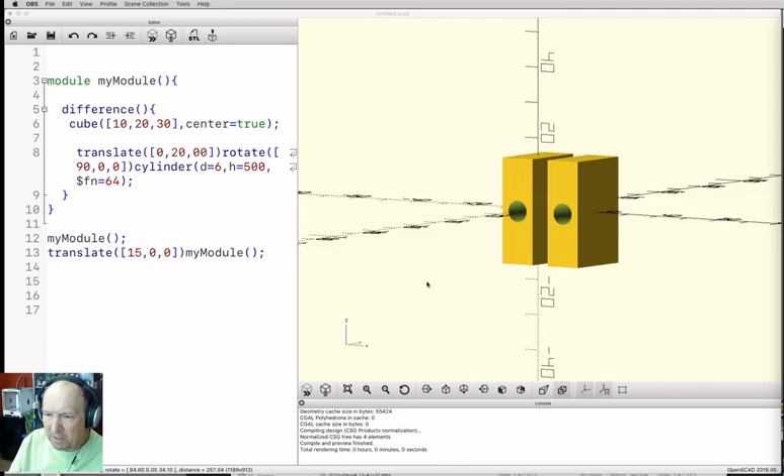So what I want to do now is make a copy of the servo motors. Before we can incorporate these into our design, we really want to see what they would look like, so let's make one of these.

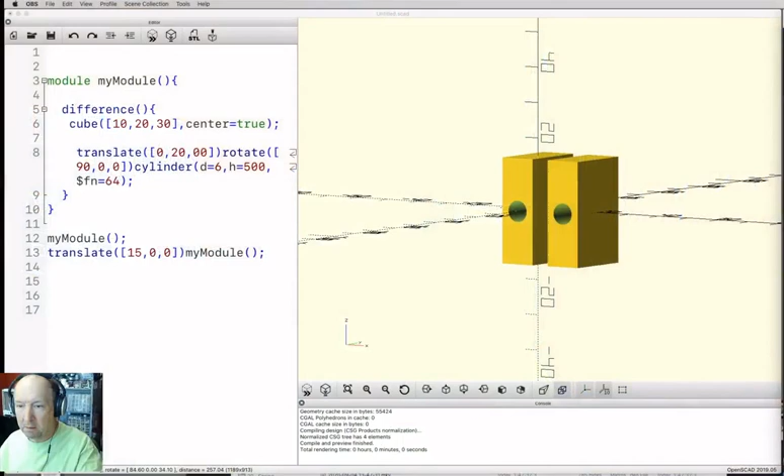Let me just get rid of everything that's in here since I'm starting over. Okay, and that goes away.

The first thing I want to do is use calipers to make a measurement, in millimeters. We've got this basic cube shape to start with, so let's just start that. It's a cube, let me do that. Cube.

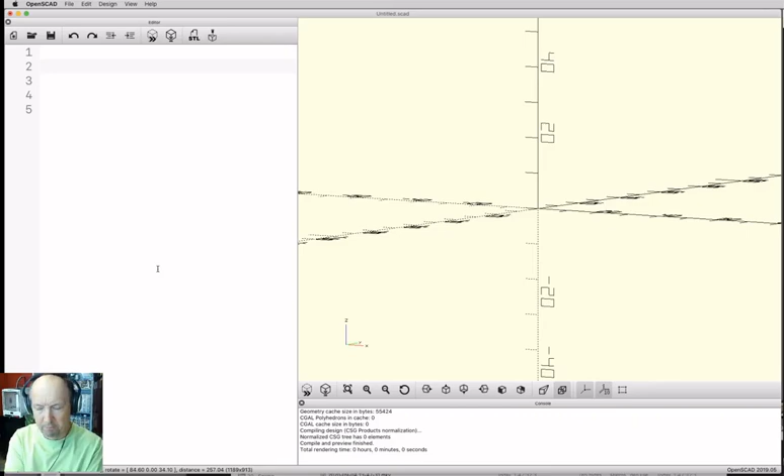X dimension is going to be 22.5. Y dimension, I'm going to hold it this way, so Y dimension is front to back. That's going to be, looks like about 12.3.

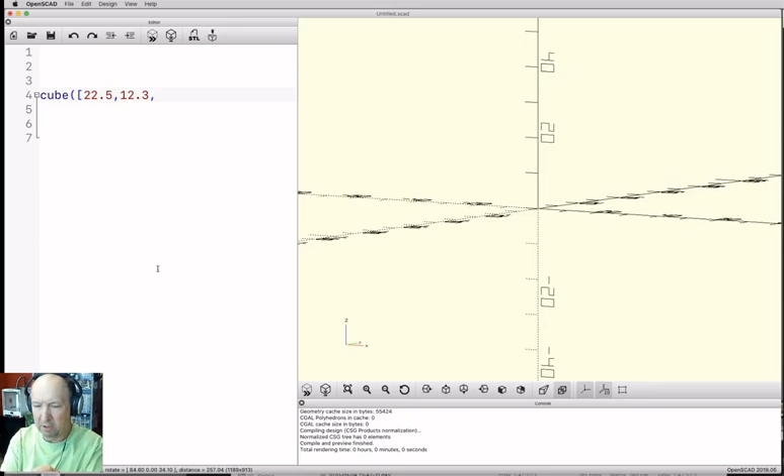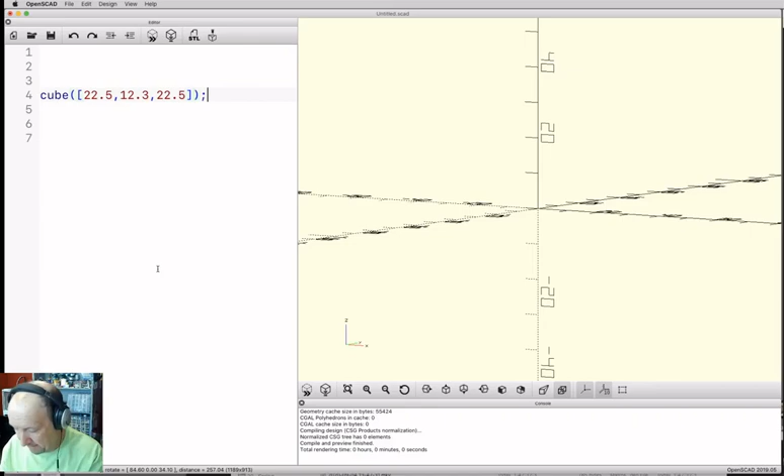And the height, now it's got the round piece on the top. I'm going to ignore that for the moment. I'm just going to go to the height of the main part of it, because we want to actually model the whole thing, and that looks like it's about 22.5 also. Close that, hit F5. Okay, so there's the body.

We've got these wings on the sides. I need to put those on there too. Everything is additive, so if I just make a whole piece that's big enough for it, let me make another cube, and we're going to have to use translate.

So let me just put that in there first. I'm just going to put in zeros because I know I'm going to need it, but I don't want to put it in there yet.

Cube, and the X dimension, I was holding it this way, so X dimension is now 32.5. Y dimension, that's the same as the other one, that's 12.3.

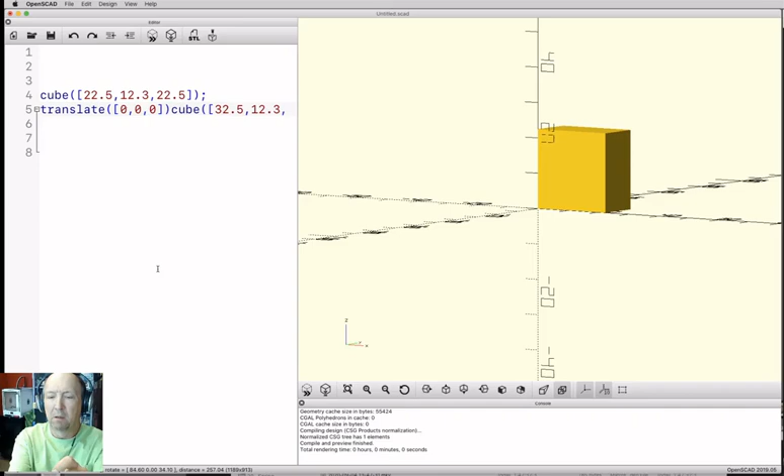Z dimension, this thing's really thin. This thing is only 2, let's say 2.3.

Okay, so when I hit F5, there it is. Okay, so it's not in the right spot. We got it in there, but it's just not where we want it to be. It needs to be slid over about half of what's left up here.

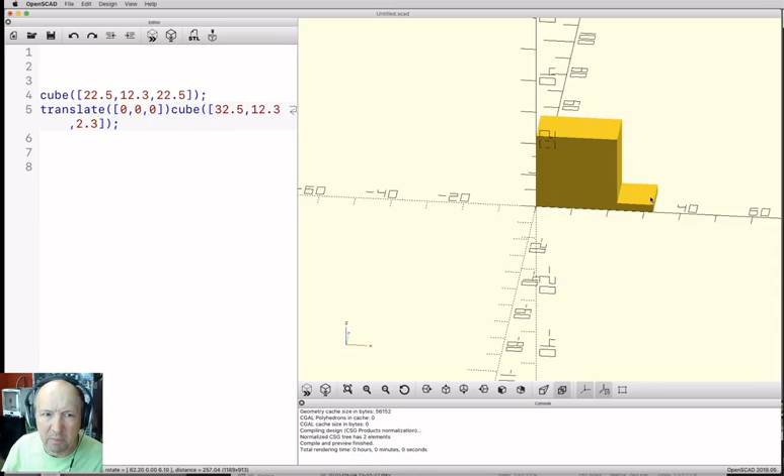Now we know that this is the X direction, so the cube is 22.5, and this is 32.5, so this is 10 millimeters more. So I really want to slide it over 5 millimeters. Let me go 5. Oh, wrong way, put a minus sign.

Okay, that looks good, except it's not quite where I want it to be. It still has to go up. So, with the micrometer, I want the bottom of that piece to be—if I just hold it about right—some of this just has to be really close. It doesn't have to be perfect.

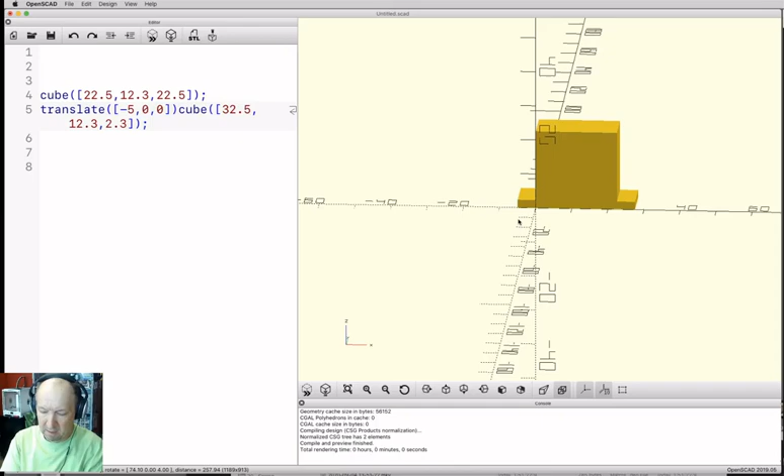We're something like 16, so if I just translate it 16, that's not bad. Okay.

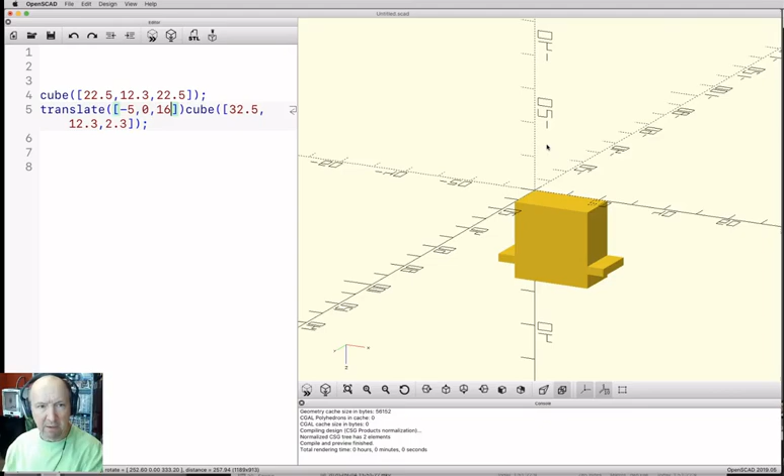No, it's got 2 holes in it. Remember we did that last time, we had the difference command for that. So if I come in here—remember it's really hard to find stuff if we don't do that.

Let me put the cylinder in first. We know we're going to need to translate it. Translate. Okay, and I'm going to put in zeros because I don't know what I want to translate it to yet. And I want to do a cylinder.

And I want a cylinder that is—wow, those holes are really small. Let's say the diameter is going to be 2.5. D equals 2.5. I'm going to make it really tall because I want it to stick out the top regardless of where I put it. Makes it much easier to find. Okay, and the whole thing's that, so let's make it about 40.

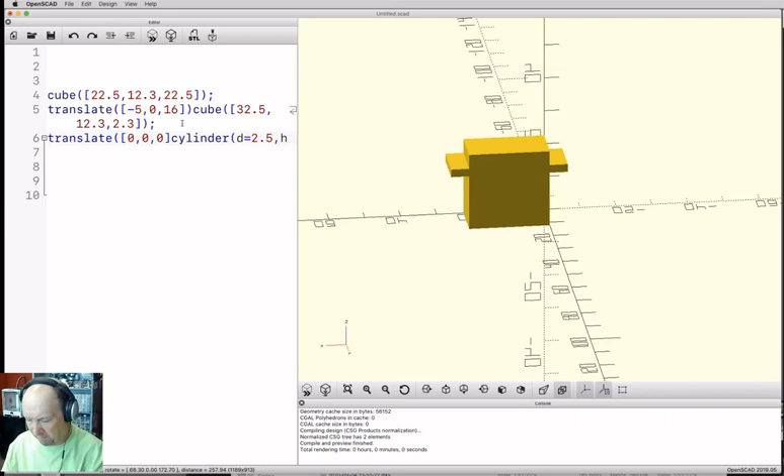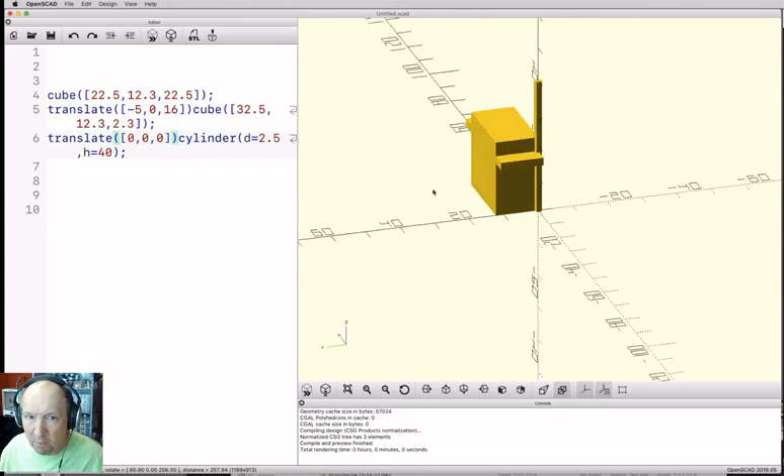So when I hit this... oh, I didn't get a parenthesis there. Now let's try it. Okay. You know, and it really isn't round. When you get really small ones, it doesn't get very round. We can make it a little bit more round.

I can say comma $fn equals number out of the air. I'm just going to pick 32.

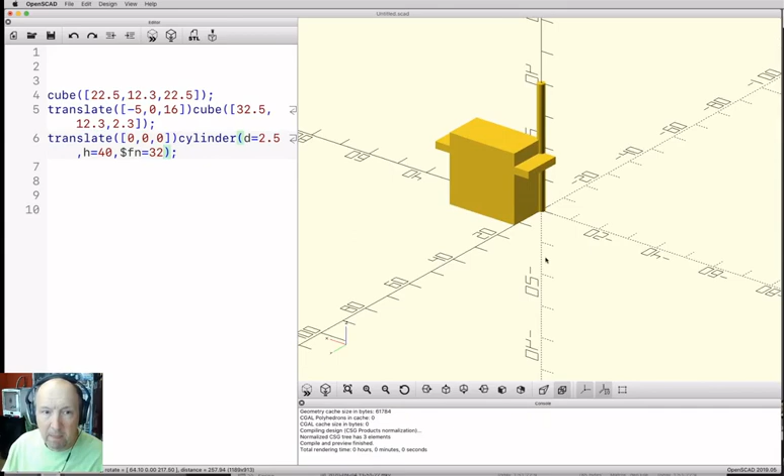Okay, so that's where it is. That's not where I want it. It needs to be translated. So I need to be in the center here. So the center is going to be half of this thickness. The thickness is 12.3. You know, I really don't want to have to do this math all the time.

Okay, let's see. It's in the Y direction. So if I come up here in Y, and I want 12.3, half of that, divided by 2. I can do the math right in line. Okay, that's a start.

Now, we know that we went over - I'm looking at where the center of this hole is versus the edge, and it almost breaks out. So I'm just going to kind of eyeball it, and I'm going to say it goes over 3 millimeters. Let's see what that looks like. And that's actually in the minus X direction. So we're going to take minus X, minus 3.

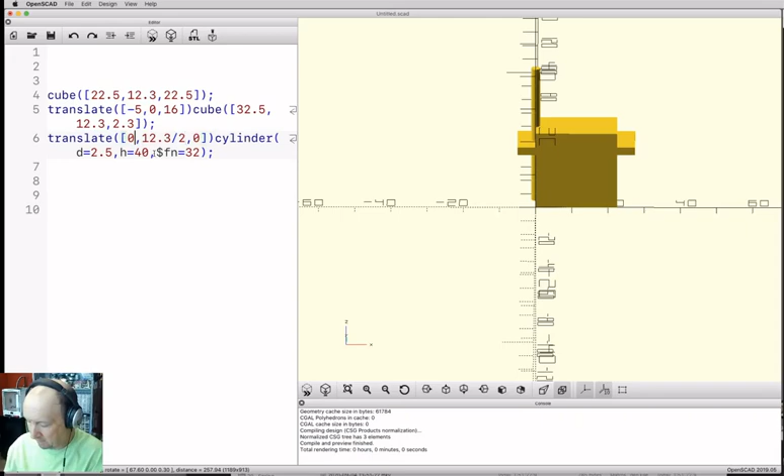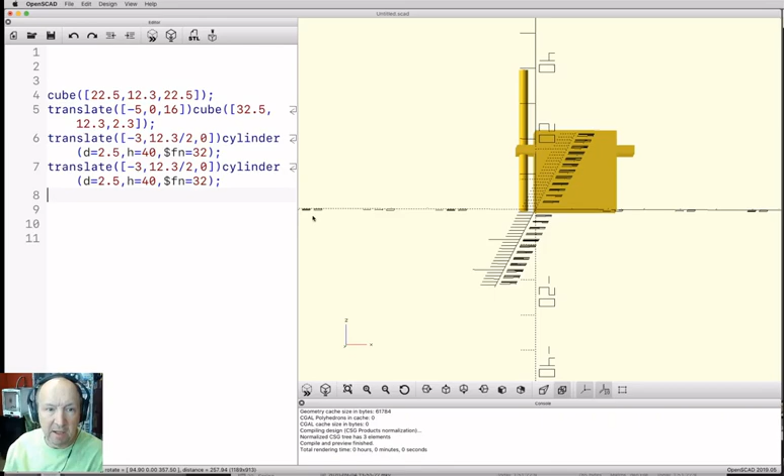Okay, that looks good. I want this whole thing again, but I want to move it to the other side. So let me just copy this, come down here and paste it again. But this time, instead of minus 3, I want to be plus something. I'm just going to guess it, 20.

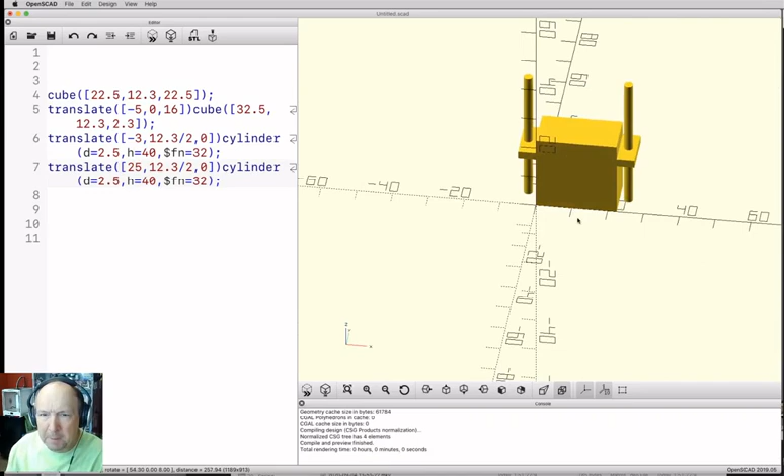Not enough. Okay, 22, 23. That's getting closer. Not quite. Let's see. That's 26, too far? 25.5. That looks about right.

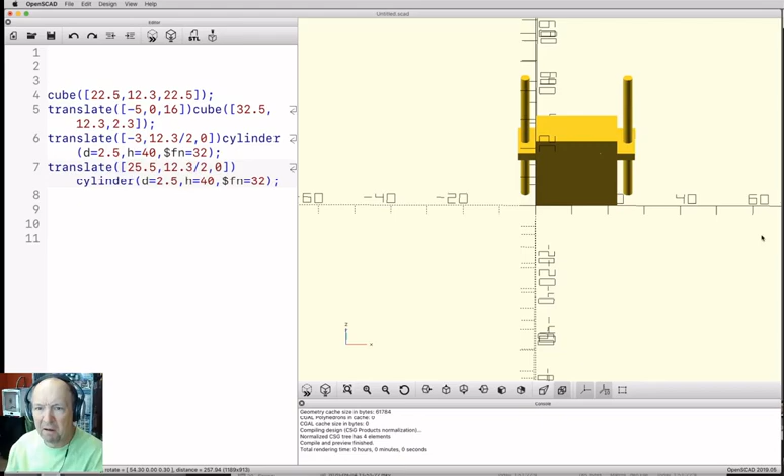Okay. But I don't want pegs there. I want holes there. So now I can come up here and I could say, well, the first cube is the big block of everything. We just leave that alone.

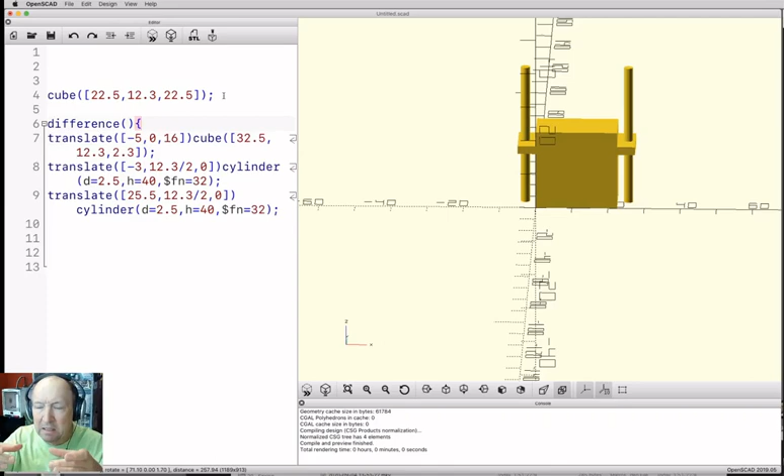But if down here, if I come in here and say difference, it's going to take the first thing, which is the plate that's really wide, and then everything else gets subtracted from it. And I need a closing for that. And now when I hit F5, that all goes away and leaves me the 2 holes.

Okay, we're not quite done. We're close. I need on the top of this thing, there's the round pieces, and there's actually 2 of them. One of them is kind of centered and is not very big around. It's only about 6 millimeters in diameter. And its height - these 2 are both the same height, and it sticks up about 5 millimeters from the top.

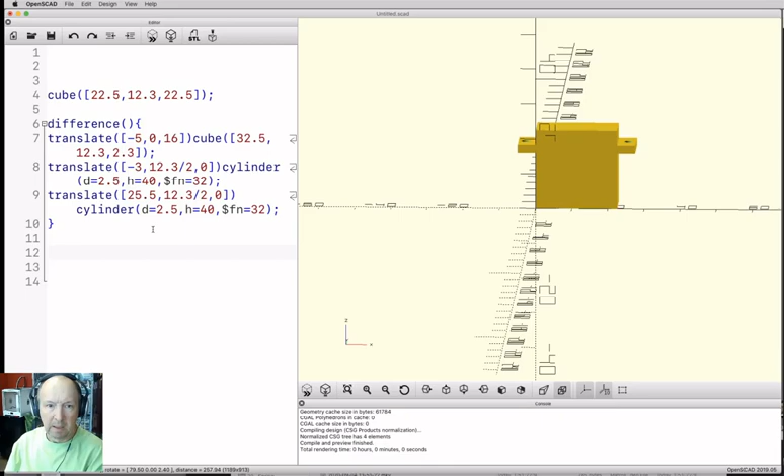So, okay, so there's the cube, there's that. I need another piece. I want another cylinder. And I want D equals 6 millimeters diameter. And I want H equals to whatever that height was of that initial cube plus 5.

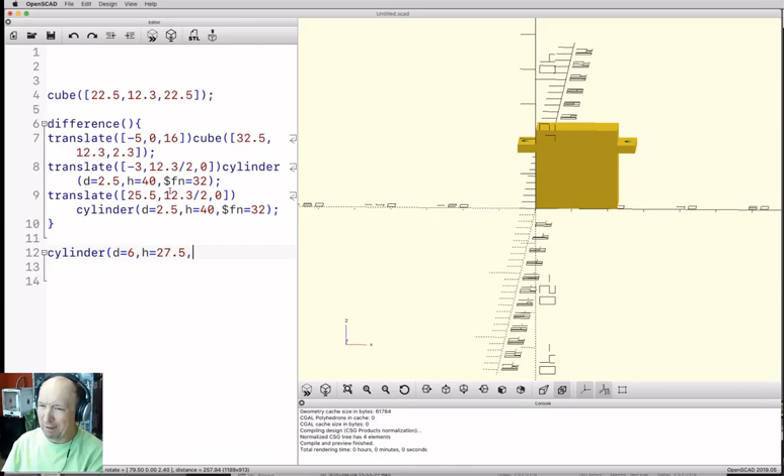That's the 22.5 I could see at the top line. Up here, this is 22.5. I want 5 plus that. I can do that in my head. That's 27.5. Okay, 27.5. And I know it's going to make it really goofy, so let me go ahead and just put that $FN equals 32. Let's try this.

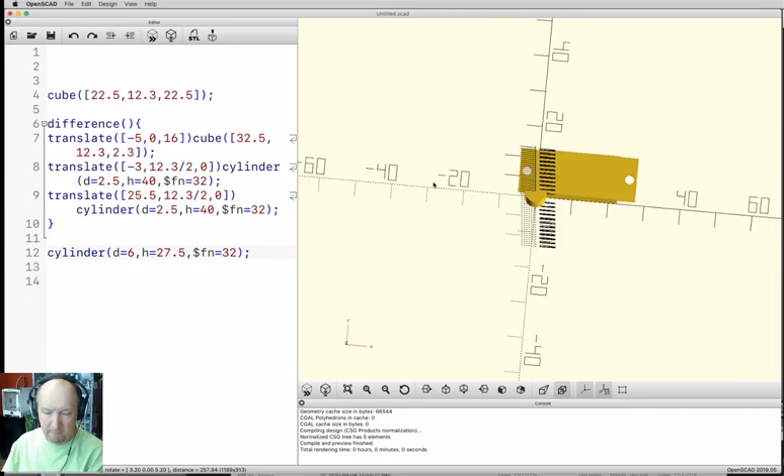Okay. It does - you know, it's in the wrong spot, so that makes it look really goofy. So I need to translate. Let's see. Let's go over here. Translate. Let me just put in zeros. That didn't change anything. Okay.

In the Z direction, no, we're all fine there. And in the Y direction, that's at half. And we did that once before. Because this is 10 millimeters thick, we want to go 5. So let's go 5.

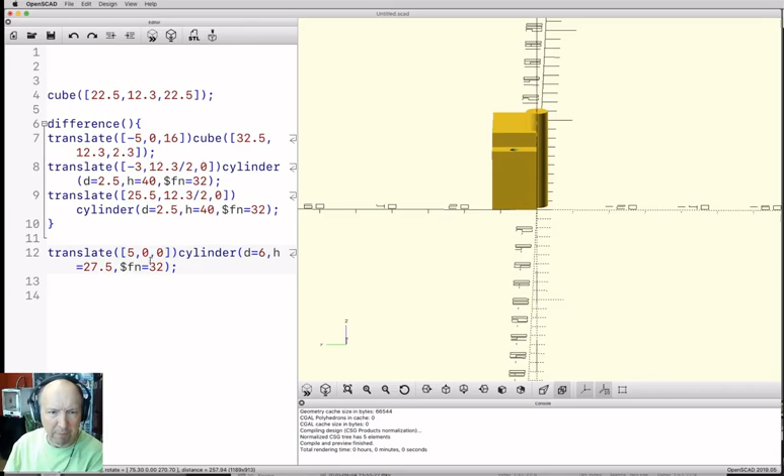No, that's the wrong one. 5. That doesn't look right in the middle. That should be right in the middle. What did we do? Oh, it's 12.3 divided by 2. Ah, yes. 12.3 divided by 2.

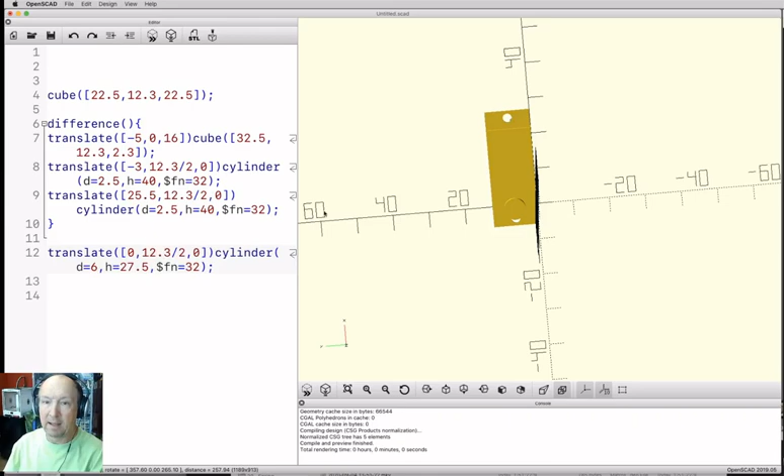Ah, that's better. Well, kind of. We need this actually centered. This is the small little hump on the side of this particular one. So what I need to do is, I need that right in the center of the cube. So I got that side centered. The other side centers out at - it's 22.5, so it's going to be 22.5 divided by 2.

In the x direction, 22.5 divided by 2. Okay, so there's the one peg. You know, we're starting to get close. So I just need that other piece in there.

Okay, so in its diameter, by looking at this, I could see that it's just the same diameter as the whole case, which was that 12.3. So I need another one. We'll have to translate it, I'm sure.

And I want a cylinder. D equals - this one's the 12.3. H, it's the same height as the one we just did, so that's 27.5. And let's do that. And what does that give us? That gives it something I can't type. I forgot an equal sign.

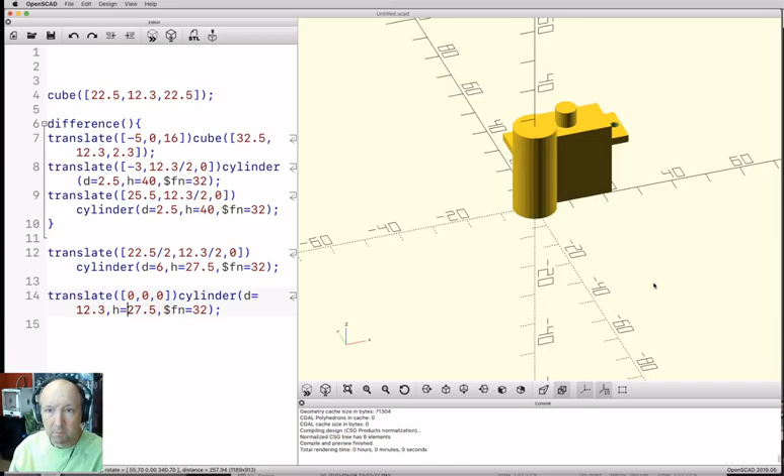Okay. Well, it needs to go in the Y direction, that way, just like the other cylinder did, the one above us. So the Y was the 12.3 divided by 2. So let me do that.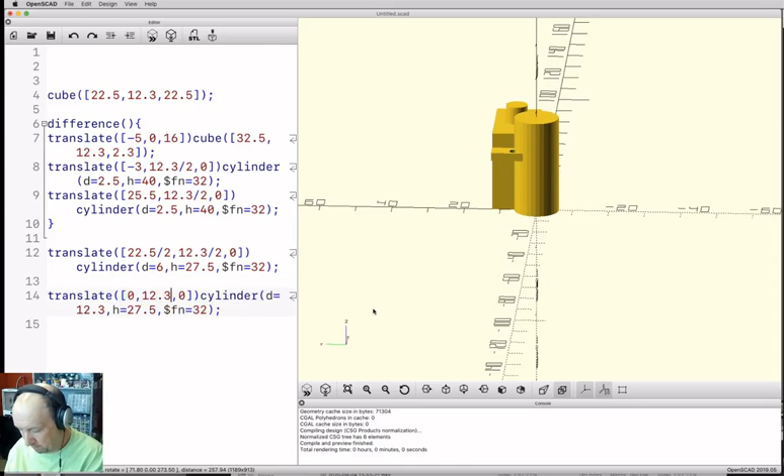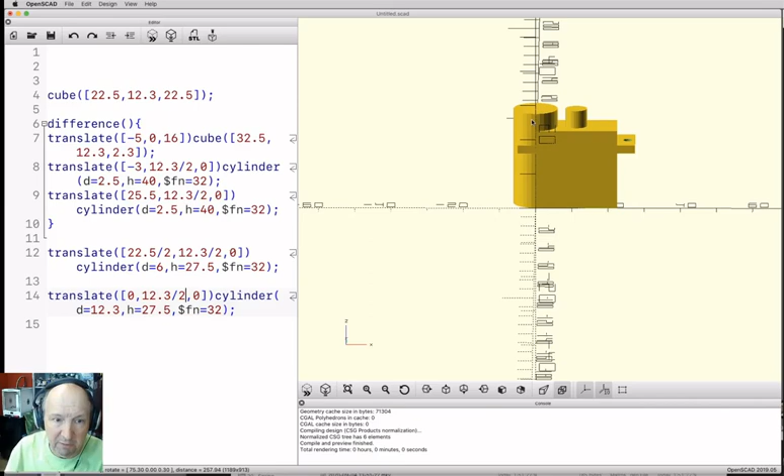And now it needs to slide over just until the edge of that cylinder is just flush with the side there, and that side is right at this axis. So if that's a 12.3 diameter, I want to slide it in the x direction, 12.3 divided by 2 also. Let me do that. If I miss this, it'll show up.

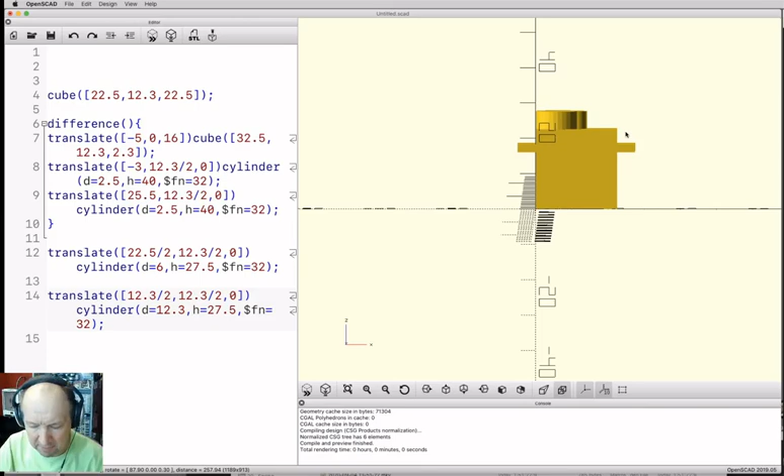Okay, so that's the servo. But now I need the little white cappy thing that sticks out the top. Just trying to make this accurate. It looks like it sticks up another maybe 3 to 4 millimeters above that, maybe 3.5.

So I want the same thing again, just like we did before. Let me just copy this. Copy, paste. But now the diameter is really small, so I want the cylinder to be 5 millimeters in diameter. So this goes down to 5.

And I want this to stick up a little bit taller, what did I say, 3.5? Let's go for 3.5. So I want the 27.5 plus the 3.5. Okay.

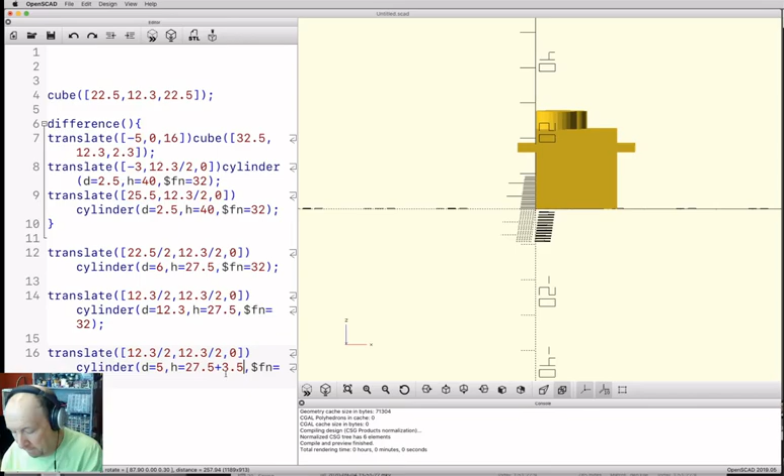But it's centered at the same, so the translate should be fine. So, okay, here's the model of the servo. It looks amazingly like the thing that we just did. And we did it in 12 minutes.

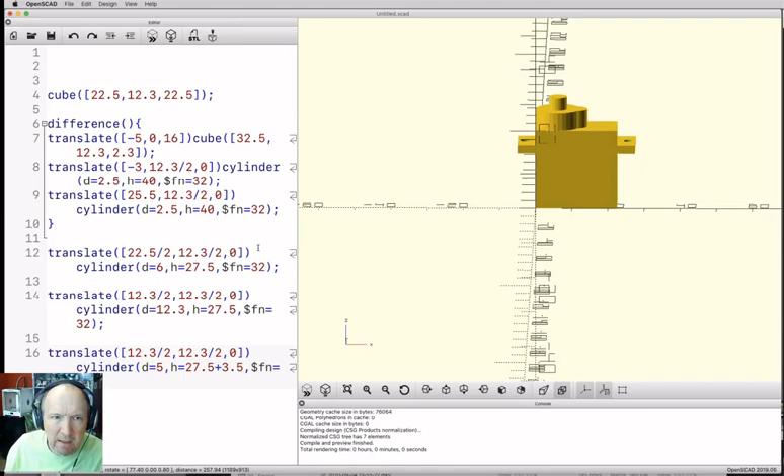So that's not too bad. Now this would be more useful as a module, so let me just come in here and say module, and I'm going to call it servo. And I'm going to come down here and close it. And then if I hit F5, it all goes away because we really didn't use it yet. But if I say give me a servo, there's the servo.

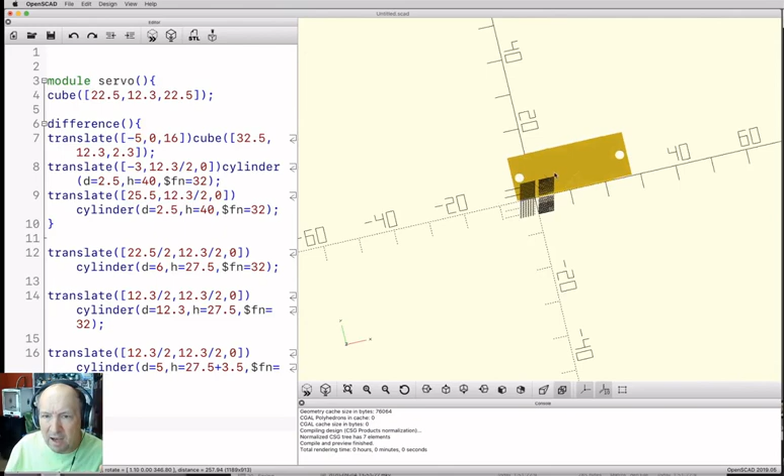The only thing that's really kind of inconvenient is it doesn't center the top, the axis right where we want it. We could do that too. We could put this whole thing in another set of brackets. I think this will work.

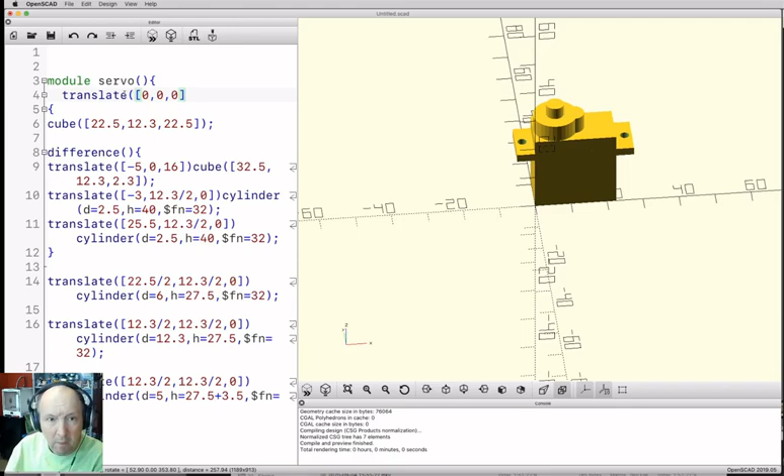And in here I could put translate. No semicolon, because I want it to take that whole thing. It doesn't do anything yet. But now if I say I want to translate this whole thing in one direction or another, it becomes pretty easy.

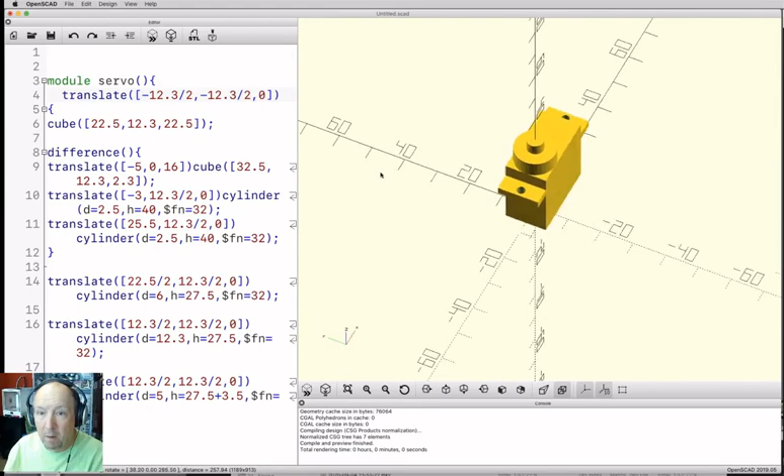And I want to go, you know, that's the 12.3 divided by 2 in both those directions. So let me just, but it's got to go negative. Okay, minus 12.3 divided by 2, minus 12.3 divided by 2. Okay, so when I go to install it, it'll just fit where I want it to be.

Okay, so there's my module. I should save this, this is something that we want to use. File, save as, because we haven't saved this one before. And it's like where? Well, I'm going to go to fall of 20, 102, and I need a new folder.

And the one was programs. This is going to be body. And this is robot V1.

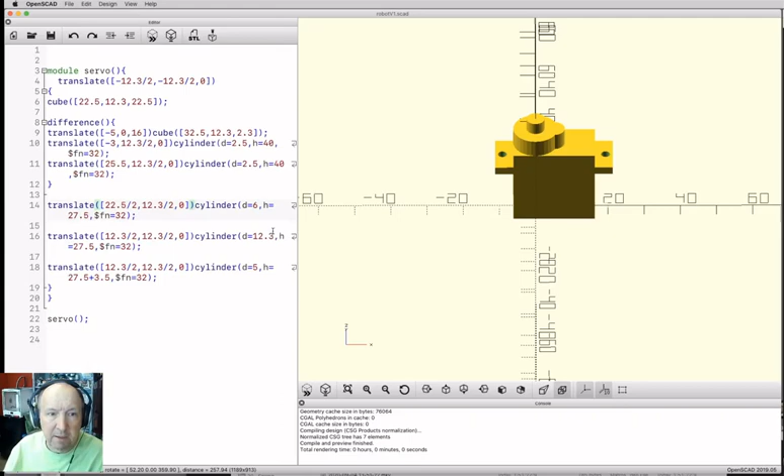I'm going to clean it up a little bit. The problem with my spacing here, let's see here, is it makes the spacing really goofy when I make the text really big, and I like to space it. In fact, I'll just do it while you're watching here.

So this is 2 over, that's fine. I want to put this over there. And I space it just kind of like I do with the regular programs. And that allows me to keep track of what's in what level.

Oh, this goes 2 more. 2 more. 2 more. That's back. That's back. Okay, and we can put labels in here too.

Okay, this double slash is comment, just like before. The robot version 1, and this is 9/4/20. Okay, now I can save again.